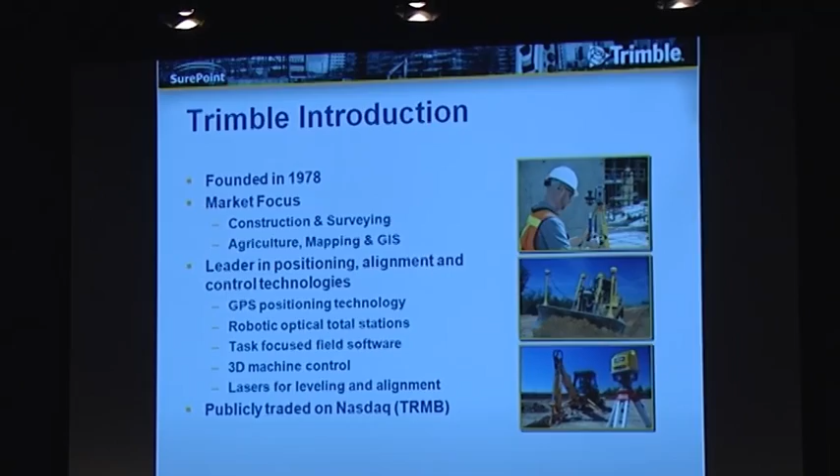Good afternoon, again, my name's John Inman. Currently, I'm Business Development Manager for Trimble's Building Construction Division. I've held a lot of hats at Trimble - I've been with them for 21 to 25 years, depending on which acquisition you count.

I've played the roles from being a software engineer, working in the dirt, from sales to product management to segment management, which is strategic planning for our product development. About 4 years ago, we got more and more involved in building construction. Trimble was heavily focused on the construction side in the heavy highway area, mining, and that part of construction, and we were missing getting our technology used in vertical construction.

So we started looking at that about 4 years ago - how could we play a bigger role in that market and that type of construction and improve productivity there. So just to give you a quick history about who Trimble is - we have a market focus today really where we're known in the construction, surveying, agriculture, mapping, and GIS markets. We're a leader in several positioning, control, alignment type technologies. This includes GPS positioning, robotic total stations, 3D machine control, lasers, and what we call task-focused field software.

What we've learned is that we've developed a lot of technology over the years, and in order to get technology used in the marketplace, it's not up to us to go out there and train people how to understand our technology. It's up to us to come up with user interfaces that work, that make our technology work the way people in the field work. So we don't want them to have to learn - it's kind of like a DVD player or a VCR.

You don't want to understand how that technology works, you want to know how to use it to do your job. And that's really what we mean by task-focused field software. So we're trying to create UI that works the way the field workers think so that they can focus on doing their job more productively and with better quality.

We are a publicly traded company. I don't know what our number of employees is now. We had a recent acquisition of Tekla, which added another 550 employees, so that puts us over the 4,000 employee mark.

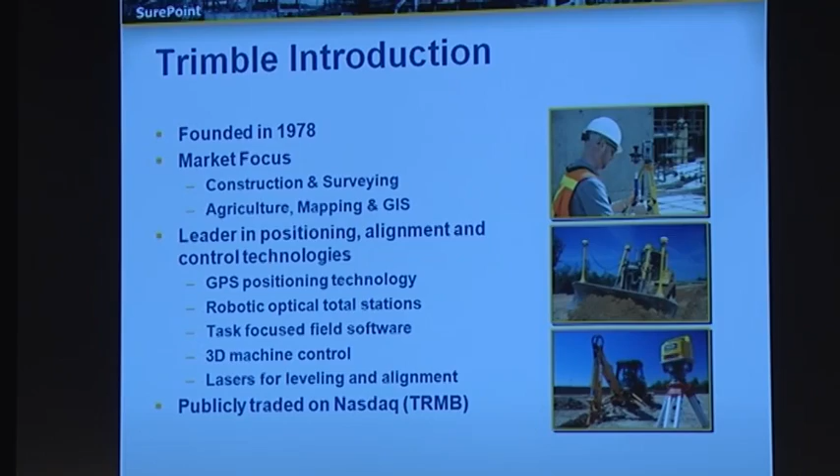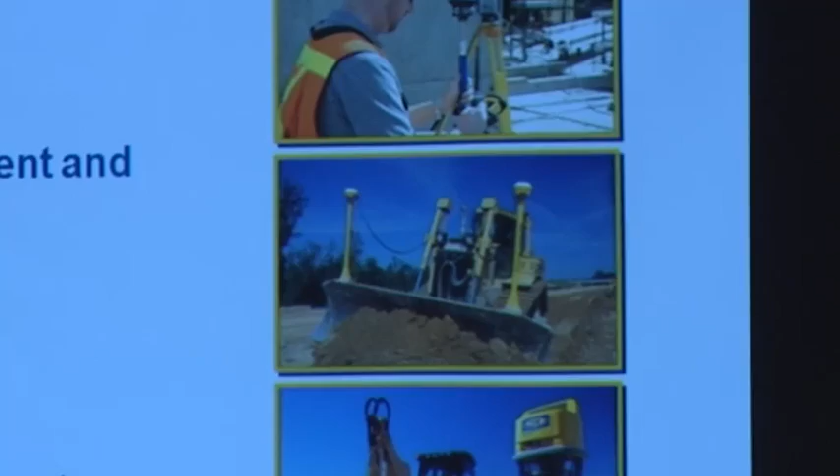If you look at the middle picture, which shows a bulldozer that has two masts on it, that's got two GPS receivers on it. The reason I bring this up is in the Australian market, this was a technology that took a long time to finally get accepted. The Australian market tends to hold back and really look at the technology, and then when they see it proven out, it explodes in the market. Today I would say Australia is probably the best penetrated market in the world for 3D machine control, where they're taking that technology and using it.

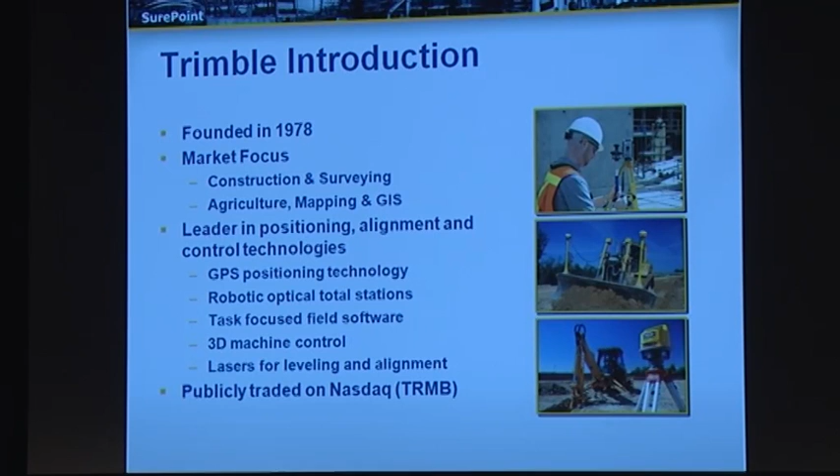How that technology works is that we're taking 3D models, putting them into the control boxes inside of the bulldozers and motor graders, using our positioning equipment to tell the machine where it is, what elevation it is, and then we automatically control the hydraulics and the cutting edge of the blade. Now what we're trying to do is take that similar concept and be able to take a coordinated 3D model and information from that model, carry it out to the field so that you can actually replicate the design in the field physically to make the building match the design.

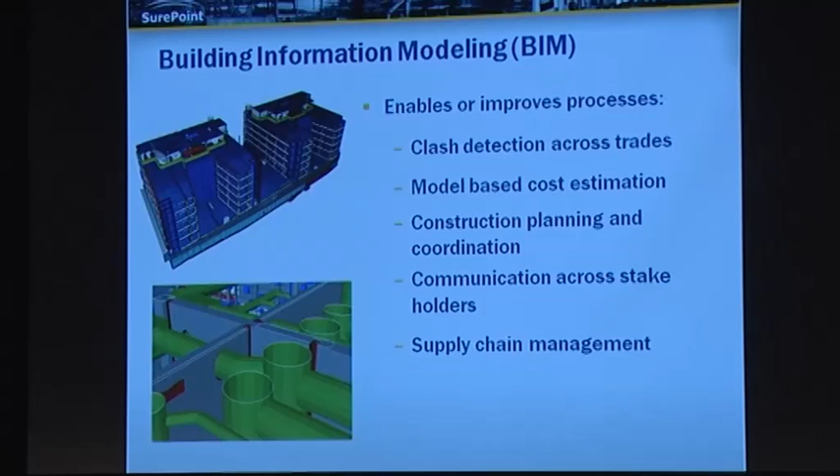So why use BIM on site? There's been a lot of talk about building information modeling, what it means, and the things it can do for you. It absolutely helps improve clash detection and find mistakes in the design before you get out in the field. Model-based cost estimation, construction planning, communication across all the stakeholders, and supply chain management. Huge benefits to all of these things, and it's absolutely worth getting involved with the BIM process.

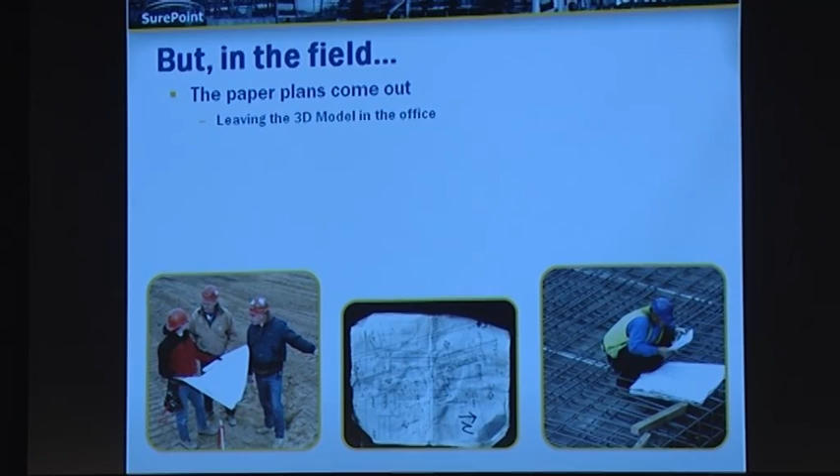But what happens when you get out into the field is that the paper plans come back out and it leaves this 3D model that's been coordinated back in the office. Traditional methods are then still being used for layout. You're pulling out, manually scaling distances off the plans, turning angles with theodolites, pulling tapes and strings to lay things out. Not actually using the value of this highly accurate 3D model that's been coordinated across all the different trades to do the layout and physically build the building.

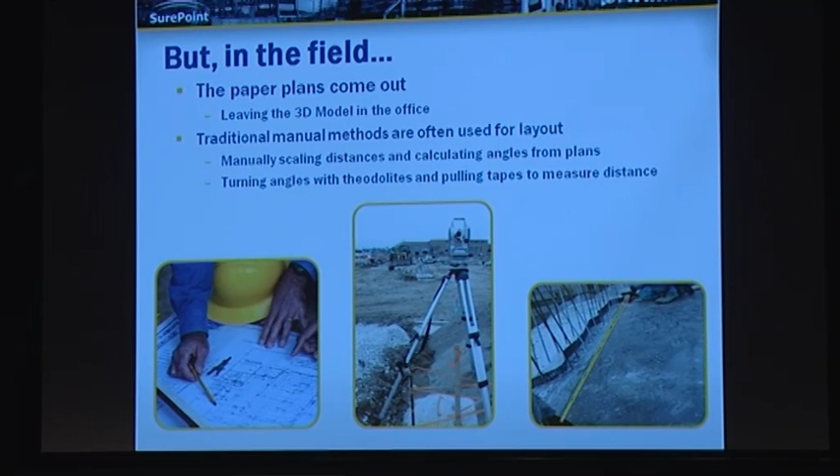And this is critical because, as y'all all know, accuracy is required by all the trades. It doesn't matter if you're laying out footings, foundations, anchor bolts, if you're laying the interior walls, floor penetrations for your pipe sleeves, inserts for pipe and duct hangers.

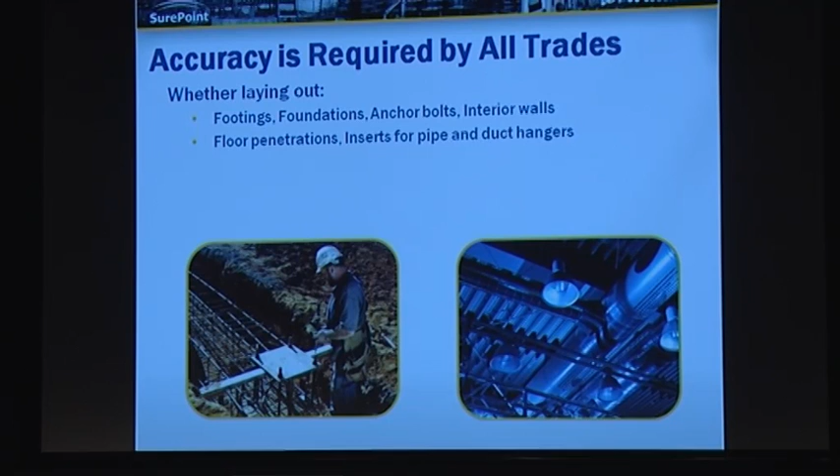All of this requires accuracy because mistakes are costly, and it's not solely because of the rework. We know that rework's expensive, and we're going to talk more about that, but mistakes also affect multiple trades. It will delay the start of other tasks when you run into problems, and it delays crews from other groups downstream. It can require design changes due to the mistake. Sometimes you can't fix the mistake - you actually have to make a design change to get around it and account for it.

The picture on the right, that particular project, was a nasty project. There wasn't a 90-degree angle in the building, and the plumbing contractor doing this, trying to lay it out manually with a 13-degree angle off of the outside wall and a 17-degree angle off of that wall, trying to get a 3.5-inch pipe sleeve into a 4-inch wide wall. It's $800,000 in rework and fines on this one particular job, doing it manually. So it can be extremely costly.

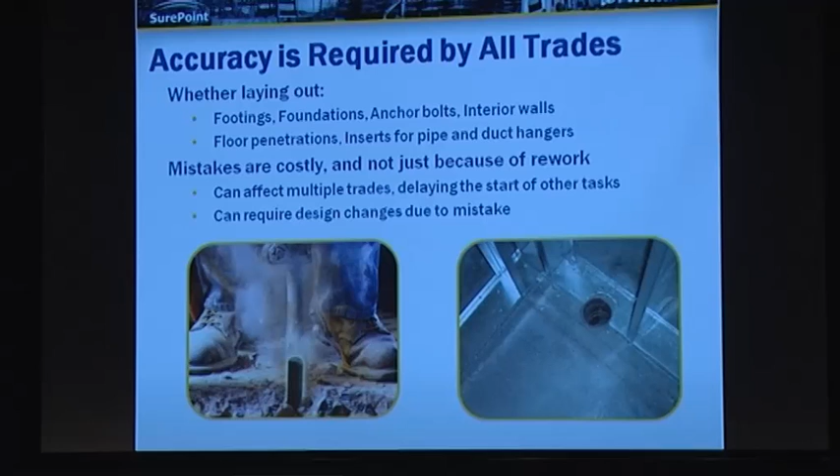But we also have - and David's going to go through some studies that have been done in the Australian market about what the true cost of rework is.

Thank you, John. So I put this together because more and more I find myself in front of general contractors giving this presentation. One of them in particular, Lend-Lease, asked me to put a number on rework. They had their view, and they asked me what my view was, so I went and did some research. Plenty of information on the internet, there's no doubt. What I found though, and was most topical to Australia, was an Australian-based study by a fellow by the name of Professor Peter Love out of the University of WA. What he did was he went around to 161 Australian construction projects, had his team of people go around to these projects and question them.

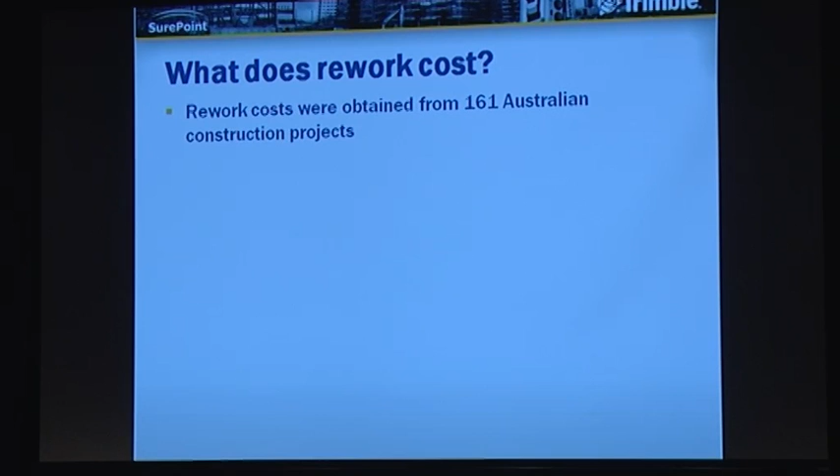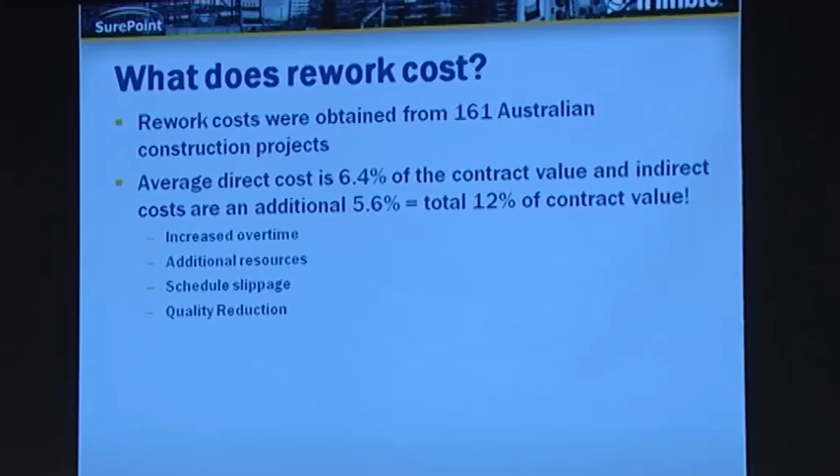What does rework cost? The research I found put that number anywhere between 3% and 23% of the contract value. It's a fairly wide range, and a lot of that was overseas information. But an Australian-based study found that the average direct cost of rework was 6.4% of the contract value - the direct cost to that subcontractor, to that plumber who put a penetration in the wrong place and had to recore the slab, to that duct installer who had to pull down his hangers and reinstall it. The flow-on, or indirect costs of that rework, was an additional 5.6%, so a total of 12%.

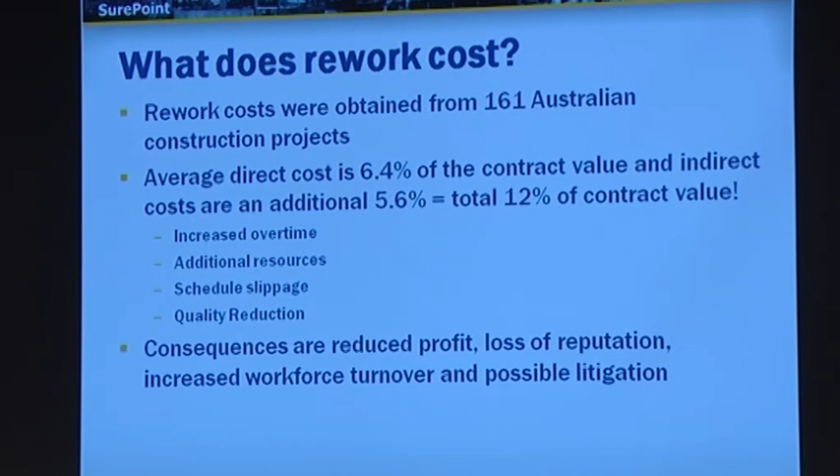I bet everyone in this room thinks they know what rework costs them, and whether it's 5%, 12%, or 20%, I think we can all agree it's a significant number and a burden to the industry. The consequences are reduced profit, loss of reputation, increased workforce turnover, and possible litigation - a whole bunch of nasties no one wants to experience.

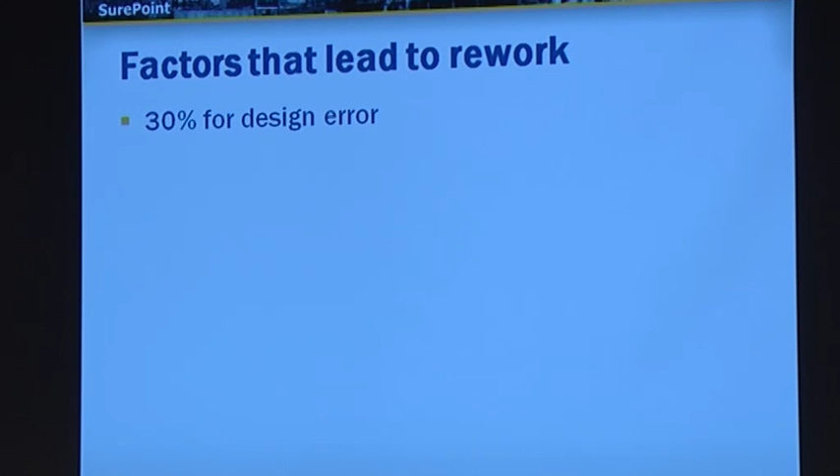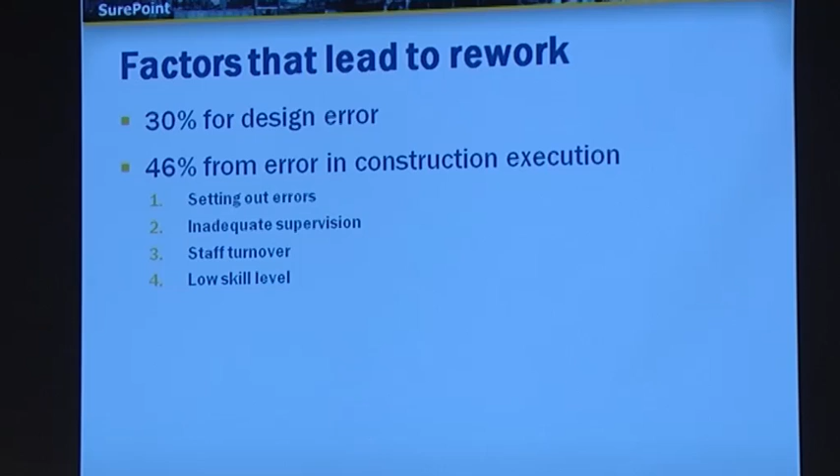The factors that led to that rework: design error, straight up front, is 30% of that number. Obviously what the BIM-MEP AUS forum is trying to achieve, and is achieving rapidly, is going to detail and getting rid of a lot of this 30% of design error. But nearly half of that rework came from construction execution error - simple setting out errors, putting the wrong penetration in place, inadequate supervision, low skill levels. Half of that number, so it's a significant amount.

The rest was due to incompatible materials, damage to other trades, or weather - things out of our control. So my point is that for 3/4 of that rework number, whatever it is, that's something we can address with the use of a constructible model built in the office and then laid out digitally in the field. We'll get rid of a big part of that number.

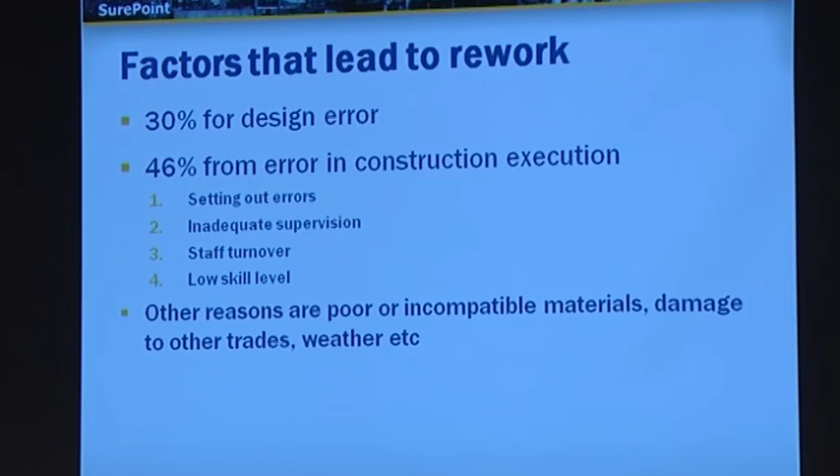In my view, this problem will only increase. Subbies are asked to lay out more and more complex structures and services, often in 3D. And on the flip side, the surveyor on site is asked to provide less and less control. Typically his contract is ratcheted right down - he'll be asked to pin a grid line every 10 metres with a very small nail head and a couple of RLs around the walls.

Quite often he can't hit that grid line because it's on a line of columns, so he'll offset it and put a mark with spray paint. By the time the subbies get to the deck, there's pallets in place, a load of duct in place, and they've got very little control to go from. Quite often they're using a couple of control marks, very small nail heads, and it's really quite a difficult task.

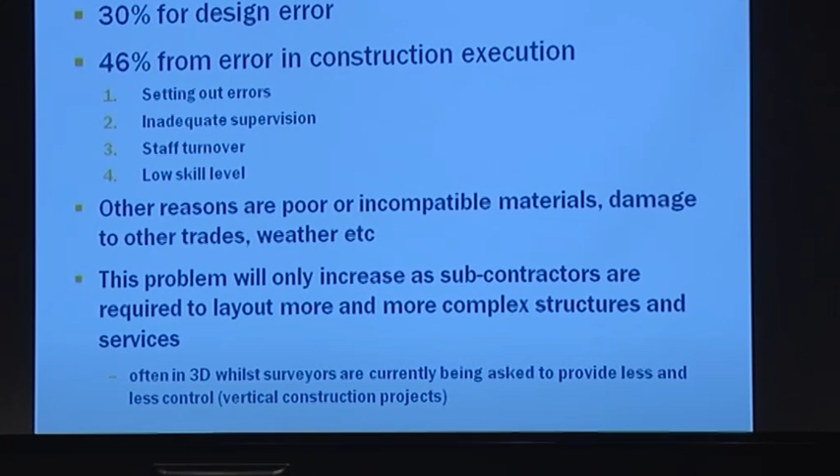We're all about putting the paper plans away. One of the case studies I'll talk about is a Triple M project, one of the first to adopt this technology in Brisbane. I remember clearly giving the presentation to a group of about 12 in their Brisbane office - 2 guys straight away loved it, right on board, could see the benefits. 2 guys were the exact opposite, hated it, thought it was the biggest load of bull they'd ever seen, and everyone else was generally in the middle.

Obviously they went on and bought the kit, and the fellow they nominated as their technology champion, a young guy, very much took ownership of it. On the first floor he laid out, not only did he install 540 hanging bracket points in one day, but he also drew the lines of duct in, the bends, the T-pieces, and marked the VAV boxes - he very much replicated the paper plan onto the underside of the slab.

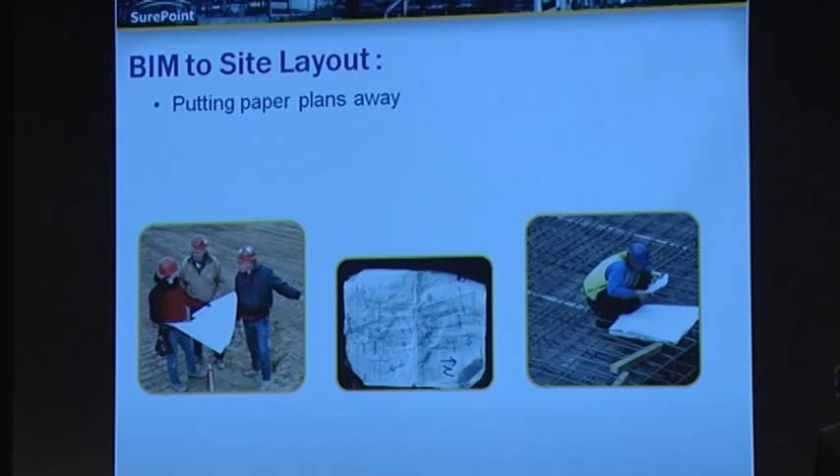I clearly remember one of the naysayers, one of the 2 who couldn't buy into it, walking onto that deck, looking up with his paper plan in hand, and there it was replicated on the underneath of the slab. It took him about a week of measuring to his paper plan and then measuring up to the deck before he was satisfied that what we were laying out was accurate. So I'm very happy to say that he too is now a converted fellow to the layout.

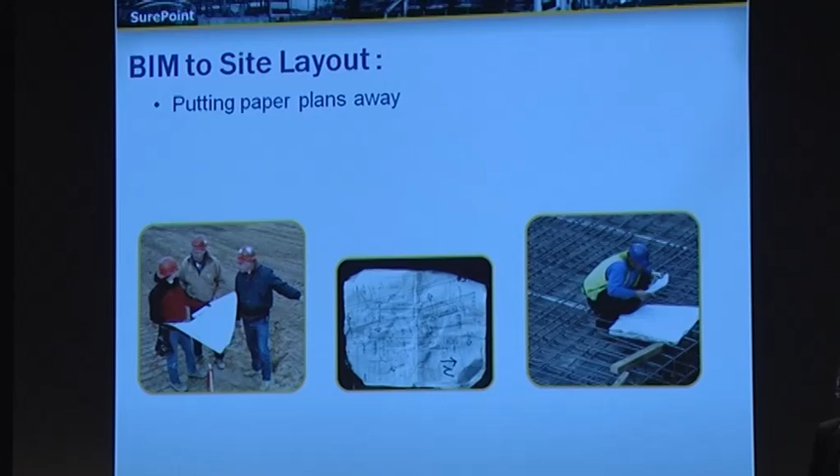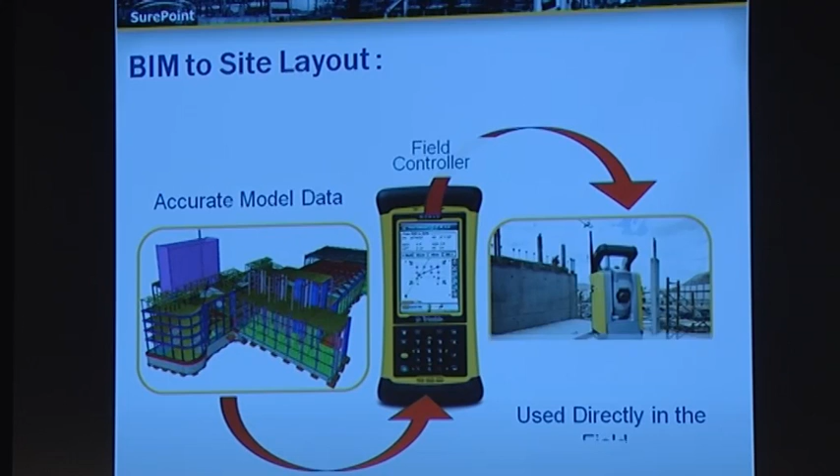So we're all about, as much as possible, putting the paper plans away. As John spoke about, taking the accurate model data to the field in terms of a field controller - we've got one out there that you're welcome to come and have a look at - and laying it out on site with an RTS, a robotic total station.

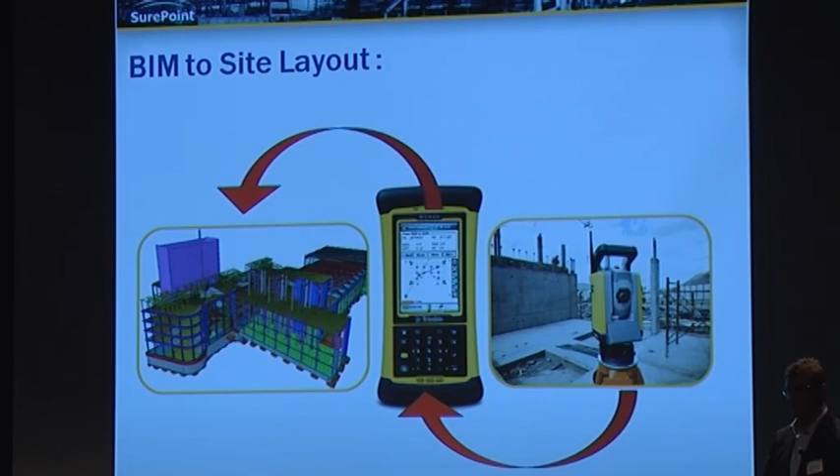That's really only one part of the circle. What we're doing when we're out in the field is capturing the as-built information. If that plumbing penetration can't go on the design because it's on the top of a ridge on a piece of Bondek and it's got to be moved over 100 mil, we're recording the as-built of that penetration. In the layout report that we encourage users to give back to the office on a weekly basis, they'll have the XYZ coordinates of the design and the XYZ coordinates of the actual, and the delta, the difference, so that movement can be uploaded into your as-built. It's dynamically keeping track of your as-built.

Might hand over to John here to detail the Trimble part of the kit.

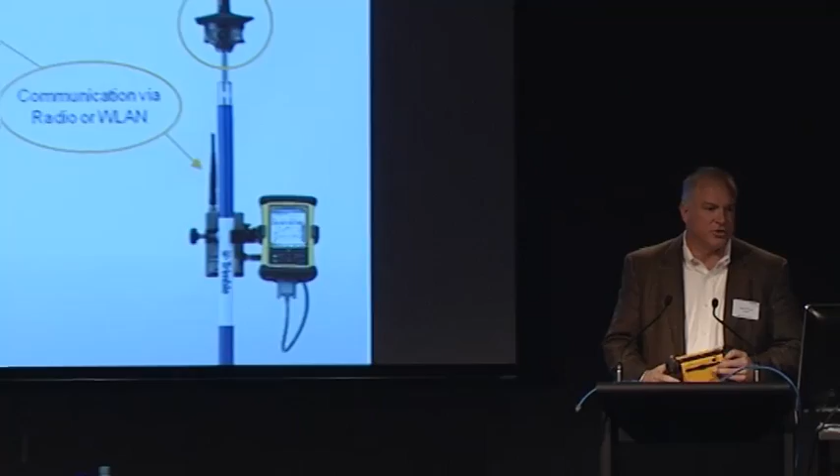I really just want to go through the components of what makes up the layout solution. First, you're going to have what we call a field controller or a tablet. We also have the handheld field controller, depending on which ends up being the best form factor for the person in the field and which specific functionality is needed.

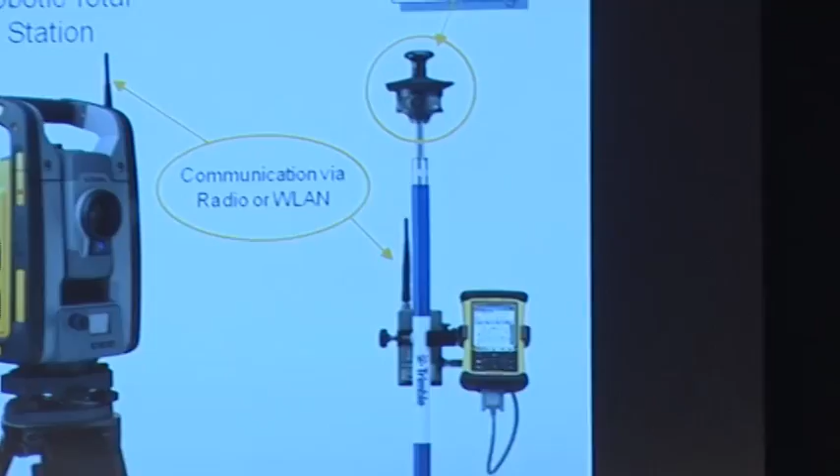Then you have the robotic total station. This is a robotic total station, which makes it a one-person solution. There's communication either via a 2.4 gigahertz radio or a wireless network, and that information communicates with the field controller so you can control the instrument. If you lose lock on the target, you can control it with the joystick, bring it back to you, and search. So you never have to walk back to the instrument to re-hook up to it. You can do that remotely from the field.

And the telescope, the optics on the total station—which one's the laser pointer? This one go forward? No, I want the laser pointer. Oh, that's going to go forward. That's what I was afraid of. Can't read this without my glasses. You fix that, thank you.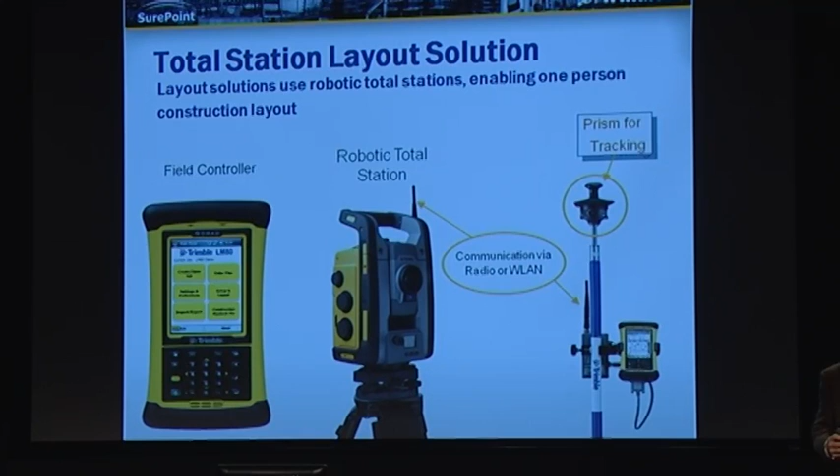So the optics are going to track the prism and follow you wherever you go. As the person walks around with the rod and the controller in his hand, it's going to track wherever he goes on the site and tell him where he is.

So what it does is allow you to set up that instrument anywhere on the site, wherever you have the best visibility. Then you can shoot to 2, 3, 4, up to 5 known points on the site in order to tell the instrument where it's located.

And it's going to show you where you are now. Where the red arrow is pointing, you've got a little crosshair that indicates where you're standing on the site with your rod. As you walk around, it's going to move and show you your position on the site, telling you your current location and your desired location, pointing to where you want to go.

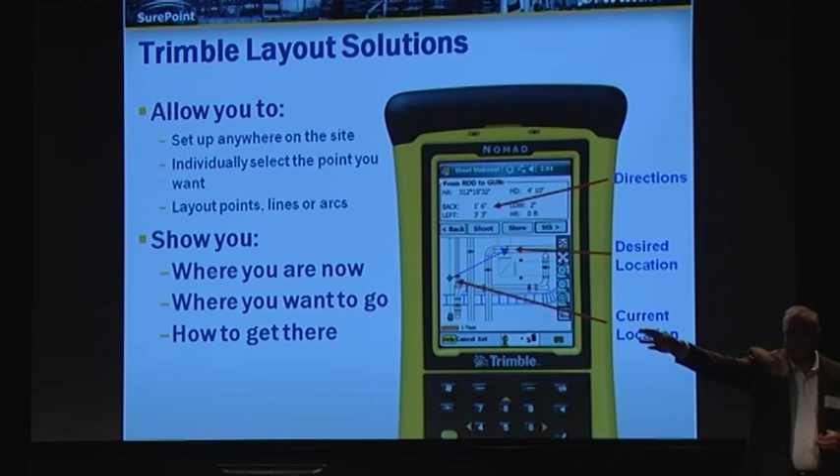And it's also giving you directions on how to get there. So as I'm facing the instrument and looking at it, it's always giving me directions relative to that. If the instrument's over there and I'm standing here, it'll tell me to go back from the instrument and to my right. If the instrument's on that side, it'll tell me to go back from the instrument and to my left to get to that point. So it's always giving directions in relationship to where the instrument is and where I'm standing, making it very easy to navigate to where I'm trying to go.

And when I get close to the point, it shifts into a bullseye view that lets me know I'm within a meter, and then I'm just bringing the circles on top of each other to get to the desired location. I can set a tolerance in the software—do I want to be accurate within 10 mil, or within 5 mil? When I go to stake that point, if I'm outside of that tolerance, it flags me and tells me by how much. If there's a reason to accept that, you can, but it'll flag it red so you know you took a point that was out of tolerance.

If you're within tolerance, it's going to stake it and flag it as green, so you know you were within tolerance and can move on. So you get a very quick check to know what was in tolerance and what was out of tolerance. Of course, if you're out of tolerance, it allows you to go back and reshoot and take the shot again.

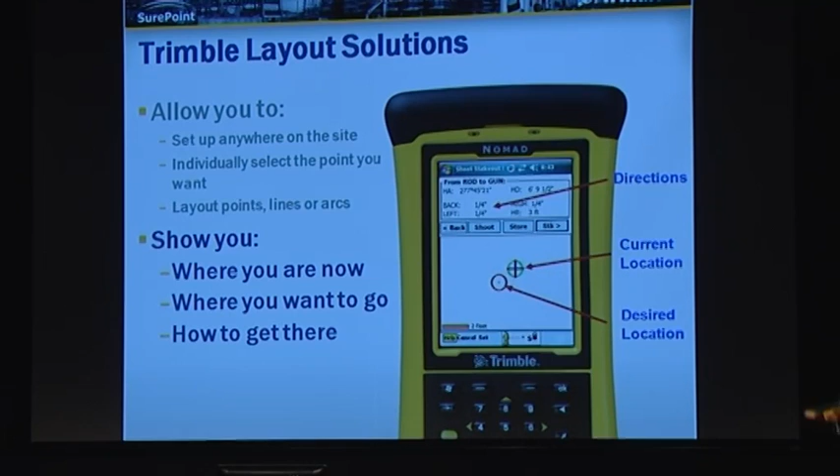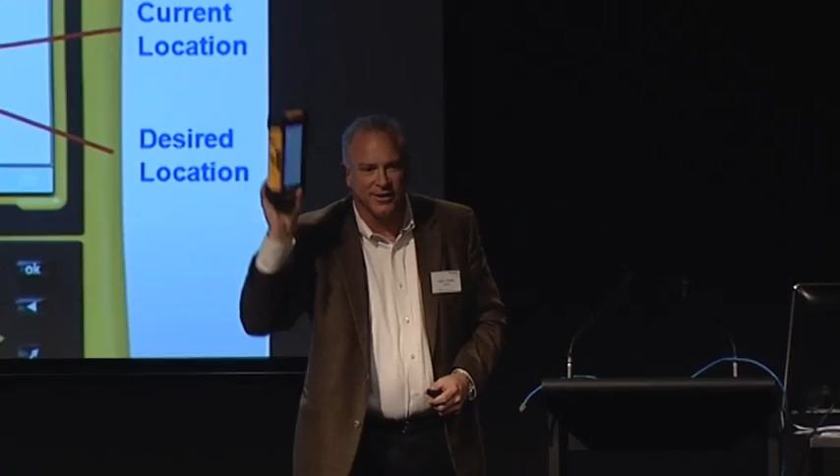One thing that's really important - I'll admit it's not an inexpensive instrument, but I don't worry about it. It's construction tough, a real working unit, so it will survive drops on concrete and still work. I actually changed the color, so I'll go back to the black background - and that one's mine, I didn't do it to Jim's, I did it to my own. I'm not worried about it.

So the BIM-to-Site cycle all starts with BIM or CAD in the office. I guess you guys know about all that. The services have to be detailed and coordinated - an extremely important step. It's got to be a constructible model, and that's what you're here to talk about. Whether that's a CAD Duct model, a Tekla model, AutoCAD MEP, whatever it is, it's got to be brought in at this point and made into a constructible model. I will make the point though that this is not the as-built, okay? That's just the as-designed model. It's not the as-built until we actually get out into the field and construct it.

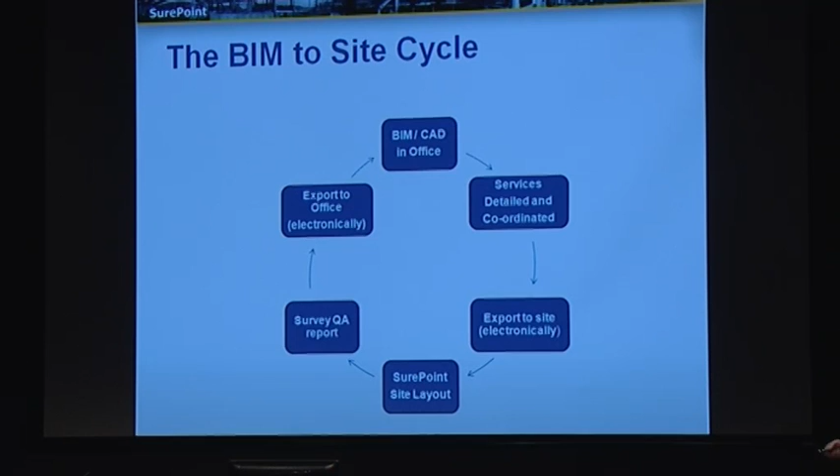So we export it to the site, we digitally lay it out with a total station, keeping track of any movements, any alterations in the field, if any penetrations have to move over walls, whatever. We're keeping track of that information, populating the as-built on a weekly basis. It can be quality checked and then loaded back into the model. So that's what we mean by the BIM-to-Site cycle.

I've spoken a little bit about this already, so I won't go over it too much again. We do, as Jim stated earlier, extract the point data directly from the model. We can do that within CAD Duct, within Revit, and other tools. So we're taking the information directly from the 3D model and laying it out in the field.

The on-site solution from my point of view is to supply total station layout kits to all subs, along with layout training. I'm in front of a lot of head contractors giving this presentation, encouraging them to adopt digital layout technology, and they're very open to it. If they've made the step to BIM, they're very open to then utilizing digital layout solutions to replicate that accuracy and then populate the model.

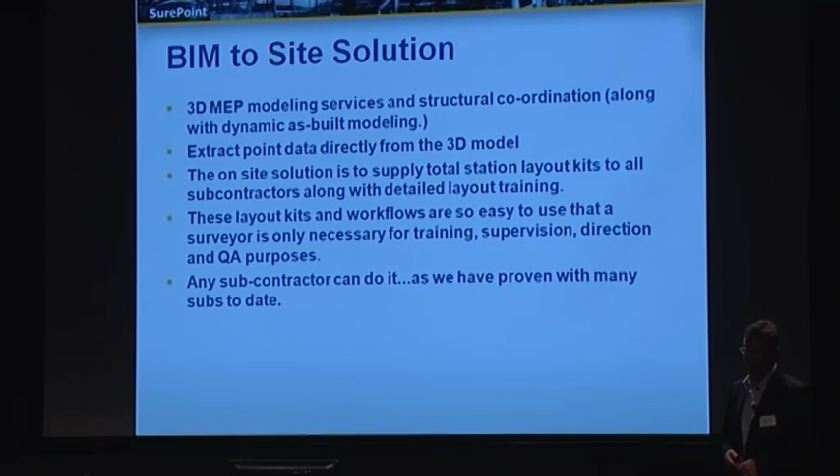The layout kits and workflows are so easy to use that a surveyor is only necessary for training, supervision and quality checking purposes - any subby can do it. We've got many examples in Australia right now.

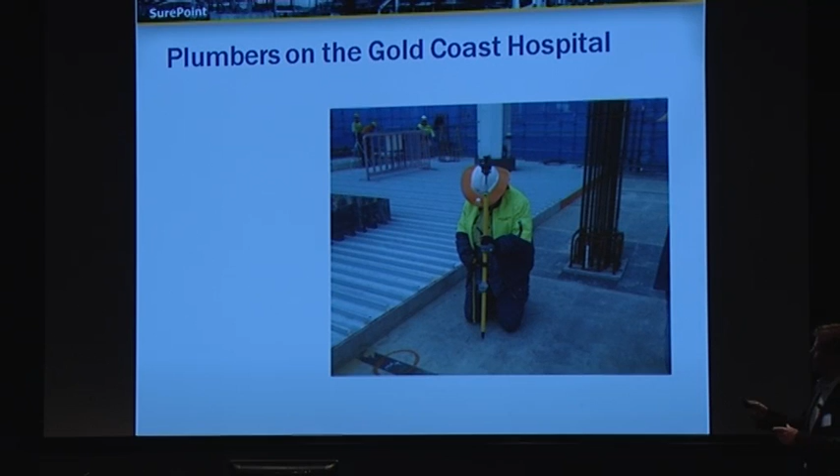This is the Gold Coast Hospital site. It's a large site, with about 10 or 11 tower cranes, and roughly 1,000 penetrations per floor on that job. This guy's a plumber, not a surveyor, but what he's doing is laying out the penetrations prior to concrete. You can see what he's done in the foreground of that picture - he's marked the point with an X. He's got some attribute data there, so the person coming behind him knows that's a 90mm stormwater pipe or a 150mm sewer pipe or whatever it is. Then he moves on to the next position.

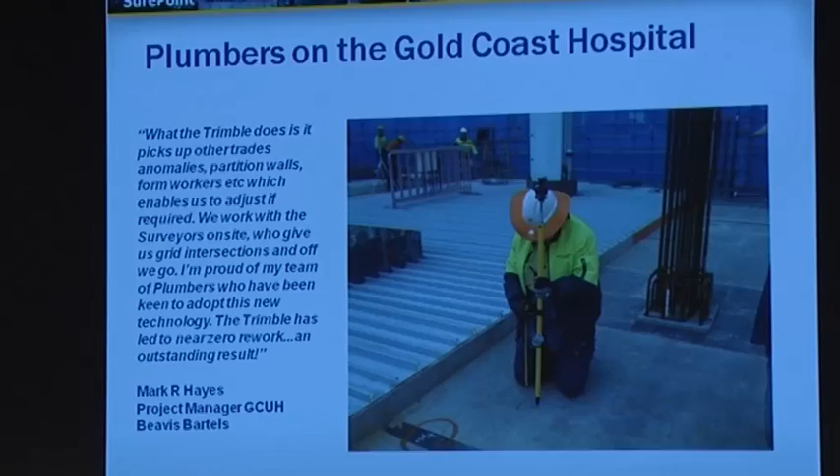Mark Hayes is the project manager for Beavis on that site. What he says is that the Trimble picks up other trades' anomalies - partition walls, formwork, etc. - which enables them to adjust if required. So when they're laying out and get to that point for their penetration, if for whatever reason it doesn't line up with the formwork or interior walls, they make that change then and there, before concrete. That's the point - this leads to very little rework. We work in with the surveyors on site who give us grid intersections and off we go. He's proud of his team of plumbers who have been keen to adopt the technology. The Trimble has led to near zero rework.

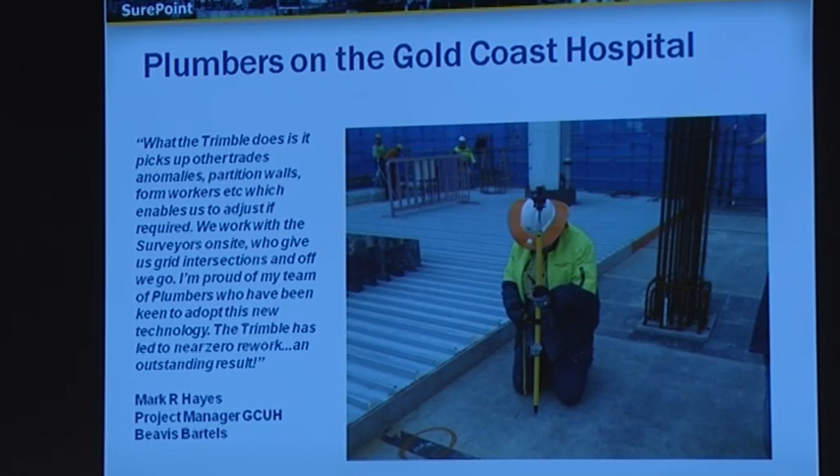This was one of the first companies, along with Triple M, to adopt this technology. This made the technology very visible to Lend-Lease. Lend-Lease now, as they move forward, particularly in Queensland, want to roll this out onto their next lot of upcoming projects, so I'm working closely with them in Queensland to get this sort of technology going.

I mentioned this site earlier. It is the Triple M site, 111 Eagle Street, a Leighton's job. This is the fellow here that shoots 540 points per floor. They only use the instrument one day per week over a 54-floor building.

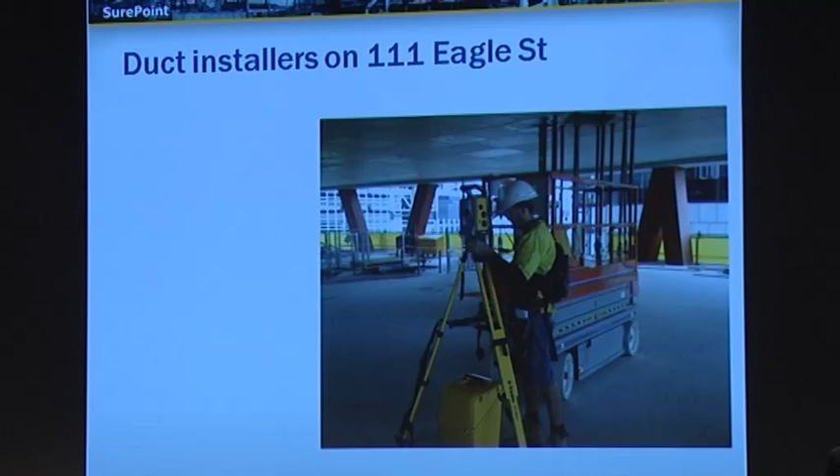You'll find a case study about this site in your welcome bag. It details the savings Triple M achieved on this site. I can tell you, in a nutshell, in 3 days they laid out and installed the hangers per floor. That's a saving of 6 days per floor over 54 floors.

Thank you, Mark, for allowing me to say that. It's been a great site for us. Peter Szach is the project manager, site manager on that site.

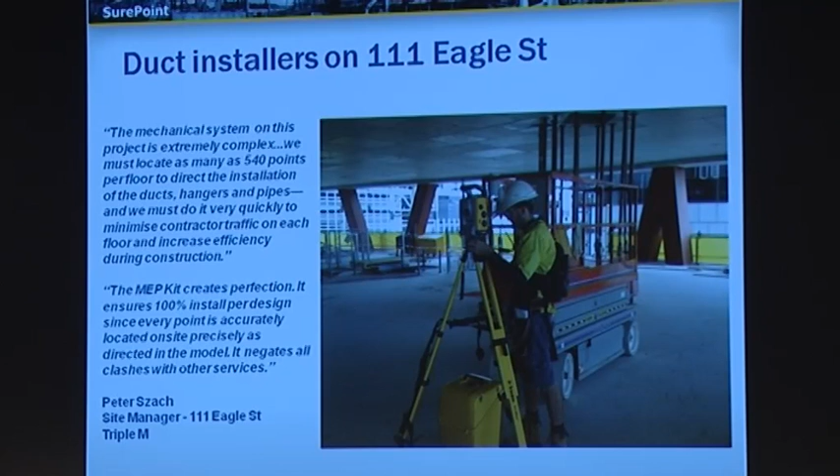He says the mechanical system on this project is complex. We must locate 540 points per floor to direct the installation of ducts, hangers and pipes, and we must do it quickly to minimise contractor traffic on each floor. So they're there - as soon as those props are stripped, they're onto that deck laying out their points to get in there before the other trades do.

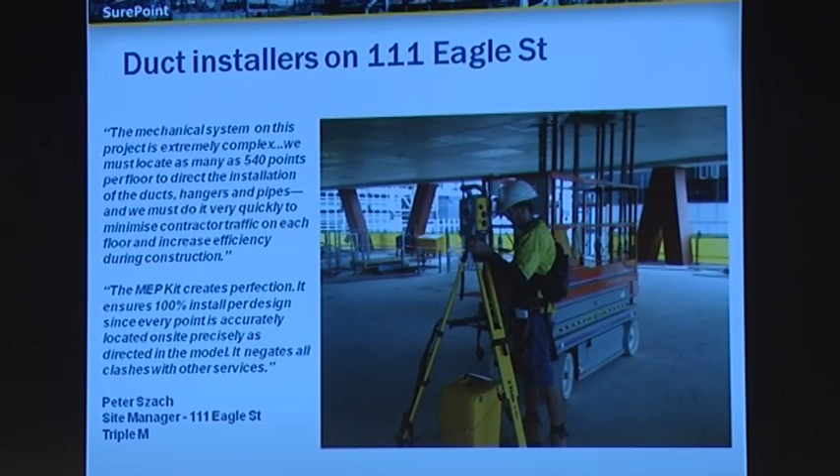The MEP kit creates perfection - 100% install per design, since every point's accurately located on site, negating clashes with other services.

So, the steps to achieve accurate layout to minimise rework: it starts with a clash-detected and coordinated model. Very important - you guys as mechanical contractors, more and more, are being asked to also be the coordinating contractor. A huge task in my view, and one that carries a lot of risk also in my view. So it's very important to get this right.

We're encouraging head contractors to specify that surveyors not only put a nail every 10 metres, but also put a highly visible network of public control points around the walls, so that it's there for everyone to see. Materials won't get placed over the top of these control points - they'll be a lot more long-lasting and meaningful to the trades.

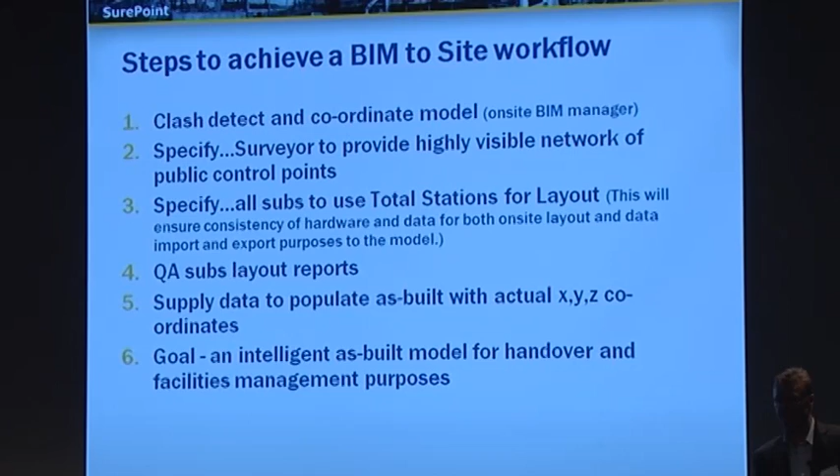A lot of head contractors now are going to specify the use of total stations to their subs. This will allow quality checking of the layout reports. The goal is to supply the as-built model with actual installation information, an intelligent model for clients for handover and facilities management purposes. That's where we want to get to. That's what BIM to Site is all about.

I don't expect you to read this. This is an example of specs I've been working with several head contractors on to put into contracts. It doesn't say SurePoint, doesn't say Trimble - it just says use a digital layout solution in the field.

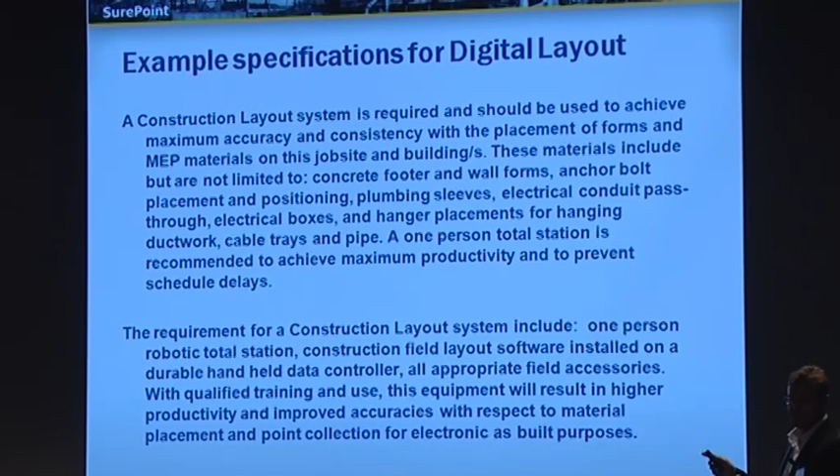So, layout's done several different ways using the robotic total station. It depends on which part of the world you're in, which method is used most, and what's available to the contractor as to what they can do.

We talk about laying out points on top of the deck from above. It's fantastic when the contractor can get on top of the deck, ahead of the concrete pour, get all their points, floor penetrations, and hanger inserts laid out, and get off the deck before the pour. The reason it was never done this way typically was because you could never stay ahead of the concrete pour, which controls the construction schedule.

You do not alter the concrete pour, especially on a 24-hour, 7-day-a-week job. So now, getting time windows to do your layout fast enough to get things placed on top of the deck, you can get on and off the deck, do it accurately, and stay ahead of the pour. That makes it a safer environment. You can do it more accurately, and you don't have to come up and drill overhead - it works extremely well.

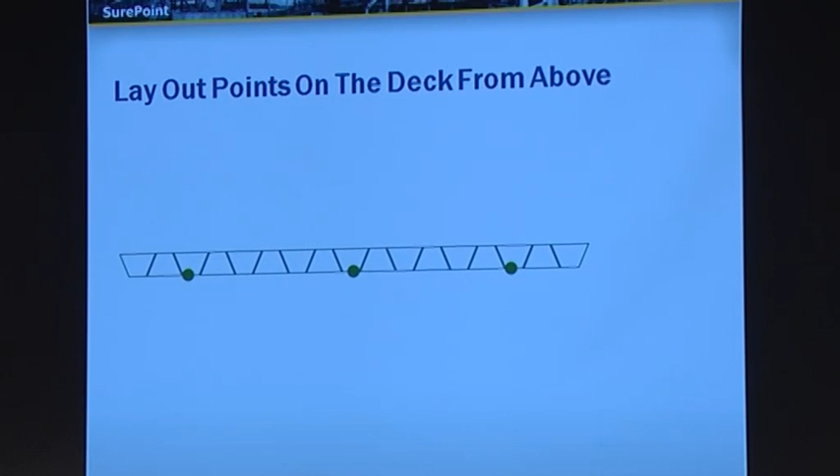This is not happening everywhere. It's happening in the U.S., probably predominant in the California region and Chicago area, not so much in the Northeast yet, but we're working on it.

Then they pour and actually put their threaded rods in and add the hangers. This is an example of some inserts being used for the threaded rods - there are different brands, but Hilti has several. Some people call them Stompits, some call them Bangits. They basically bang into the steel deck or wood decking before the pour, and there's a plastic insert that, after the concrete's poured, you unscrew to reveal your threaded insert for the rod that you just screw into it.

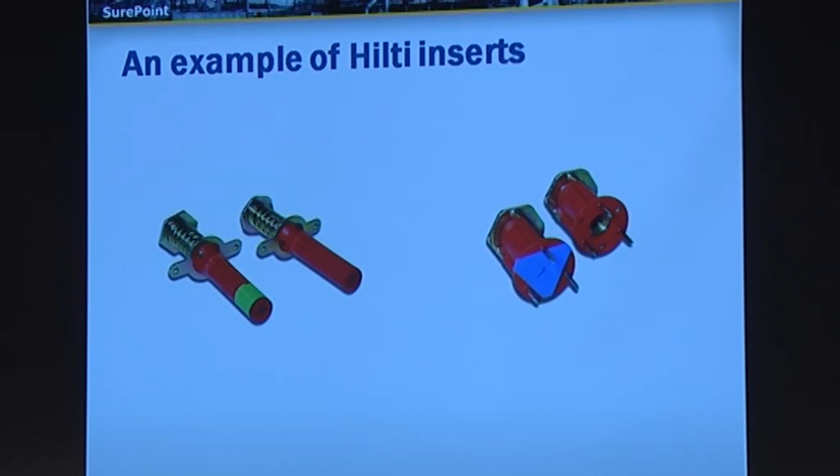You can also lay out underneath the deck. There's a laser pointer inside the instrument that we can turn on, and what that does is it shoots a laser dot to the ceiling and places a red dot on the site where you can mark the point.

Naturally, the deck is not going to be at exactly the correct elevation as the design. It's just not going to happen. It's going to be off 5 mil, 10 mil, even as much as 40 or 50 mil in some cases where it's dropped. What happens is the instrument knows where it is and what elevation you want it to be. It shoots to that point where it should be by design, but it remeasures the height of the deck and says that deck's too low, meaning I didn't get to the point I was trying to get to.

So it knows that, it readjusts the measurement based on the new height of the deck and adjusts it to put the point where that horizontal position needs to be. It has that information in the model, in the design, so it's able to make that adjustment on the fly. The person in the field doesn't have to do it.

We can do the same thing with wall layout. If you're trying to lay out a penetration through an existing wall, it'll go and turn and measure where the wall is. It knows the line you're trying to get to penetrate the wall, and it'll iterate until it finds the intersection point of the designed penetration to the actual wall that exists on the site, without the person in the field having to do any calculations to figure that out. It does all the math automatically for them and just puts the dot where they need to mark.

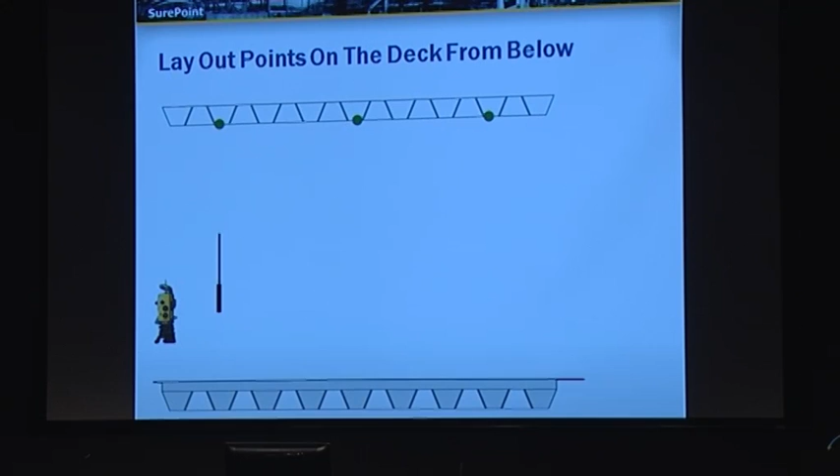So when they're laying out from below, of course, they get those in there, then they're doing the same thing, bringing the points up.

So some of the benefits here: when you're using BIM-to-Site, ideally you want to use a synchronized, clash-detected BIM, coordinated model across multiple trades. One of the messages we're trying to give to the main contractors or head contractors is if you get your key trades, these main trades, all using the same control models that have been clash-detected together, and all of them using this type of technology to do their layout, you're going to get a project that fits together a lot better out in the field, and you're going to minimize field problems.

We have PCL in the United States and Canada. They have a saying in their company as a general, and it seems backwards, but they go, we want to build it twice. What they mean is they want to build the model of this construction site virtually as a 3D model with all the trades in it, and they want to have that replicated in the field exactly as designed. That's their goal. So build it once virtually and build it a second time physically exactly as designed.

Trying to minimize rework, we know how much that costs. As we went through the numbers and percentages, one reason that range is so broad, from 5.6% to 23, 30, actually even 40%, is because a lot of these studies focus on what's the rework cost to the main contractor, the general contractor. It doesn't actually factor in the buffer that all the trades have built into their bids to account for the rework they know they're going to have, because you have to have that buffer, you're going to have that cost somewhere. So that's not even factored into those numbers, which is why you see the numbers range from single digits to 40, and I think one particular contractor claims it's 50% on their project.

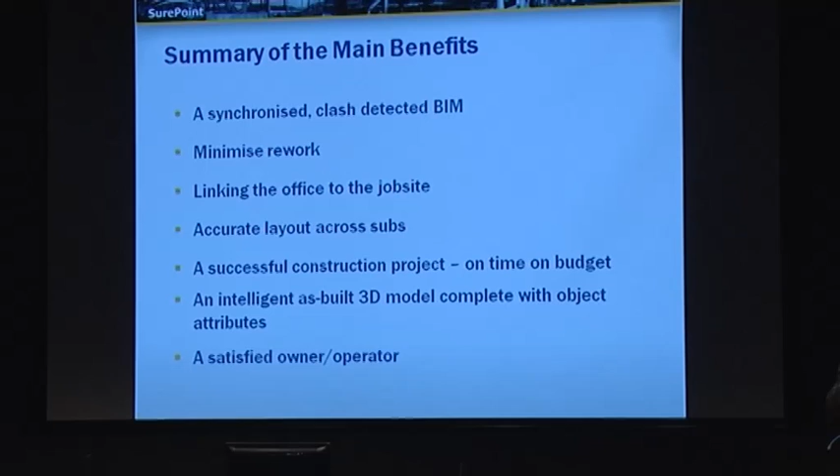And an intelligent as-built 3D model, getting that back out, allows you to give a better product that you're turning over to your customer when you're done. It gives you a more accurate record. You have to turn this over, and it actually improves the product in which you're delivering to your customer. That, in result, gives you a much more satisfied customer, satisfied owner, which hopefully will generate repeat business for you, for that particular owner.